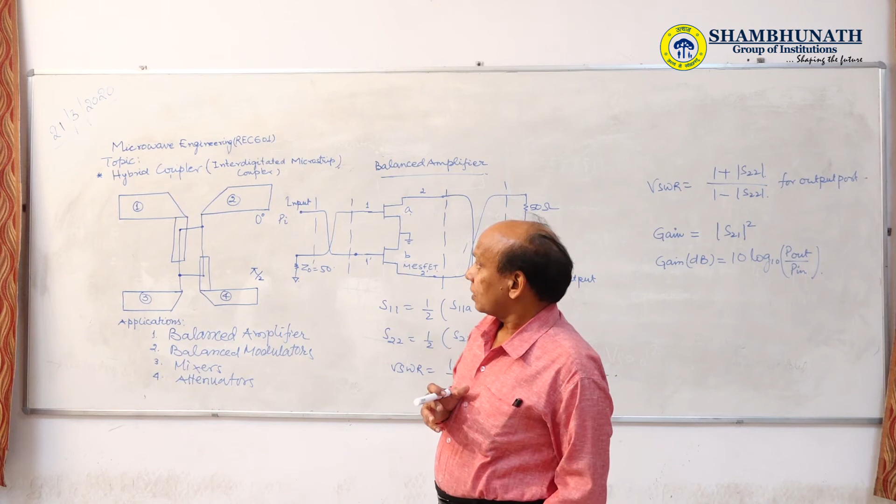That hybrid coupler we are going to discuss today, and its diagram we have already drawn. This diagram shows a hybrid coupler. What we are doing onto this, on a printed circuit board, is that the microstrip patches are cut in such a way that they can be connected by the strip lines, and all these strip lines can be joined by some means. Here we have drawn the hybrid coupler of 4 ports, that is port 1, port 2, port 3 and port 4.

These are the strips which have been fabricated and designed over the printed circuit board. On the upper side of the printed circuit board, this is the diagram of the copper cladding, and underneath this one copper plate is there which will act as ground. This hybrid coupler is connected by this strip and another strip, and these are the small width lines through which all the ports have been connected, connected in such a way that whatever the energy is, we try to understand the function and operation of this hybrid coupler.

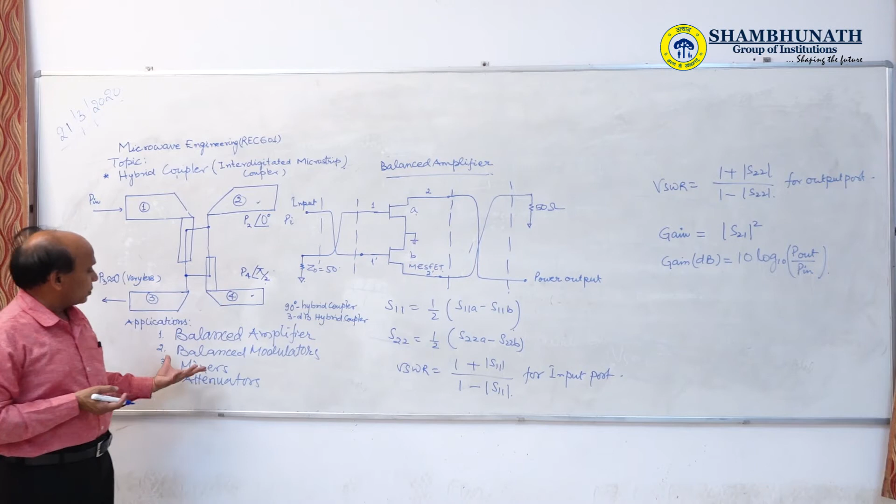This hybrid coupler is used in applications such as the balanced amplifier, the balanced modulator, mixers, and attenuators.

Here we have shown a balanced amplifier where we have used this hybrid coupler, which is also known as the Lange coupler.

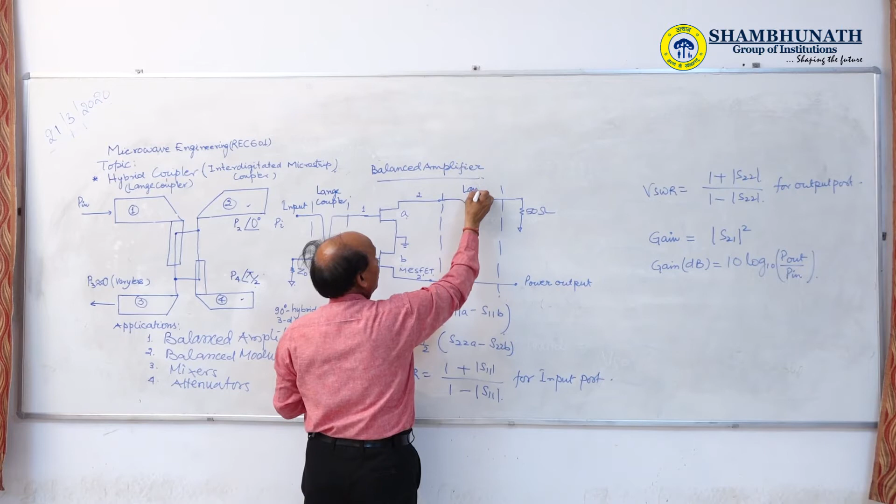Here we have drawn an amplifier, a balanced amplifier, where we have shown the use of the Lange coupler at the input side of this amplifier and at the output of the amplifier. The input of the amplifier is termed port 1, and at the output side the port is termed port 2.

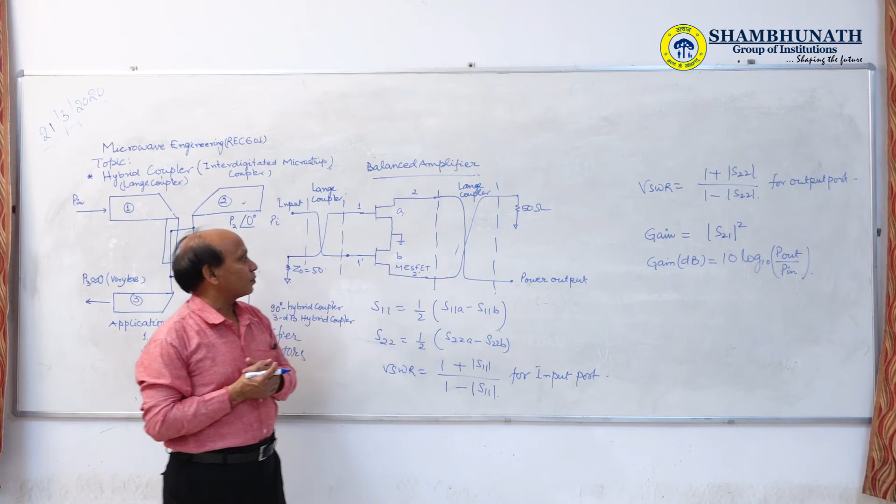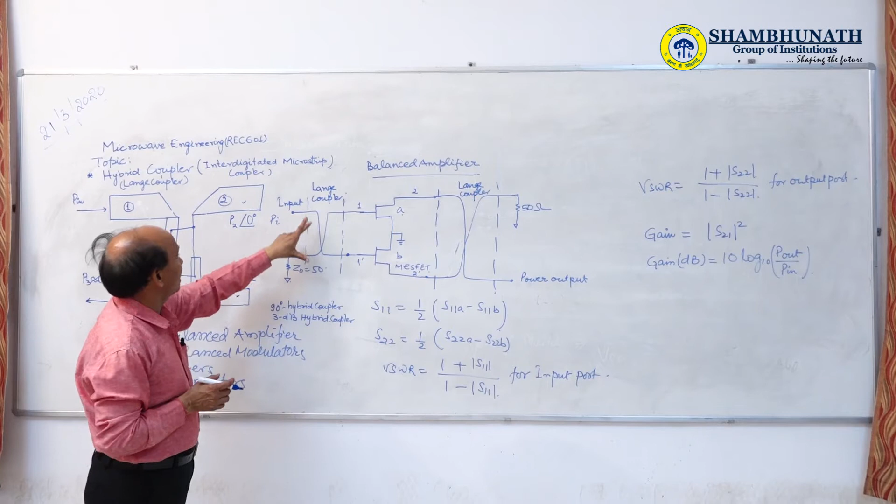Here, if we see this hybrid coupler, this lines diagram is the symbol of this hybrid coupler, which has four ports.

Here what we have done is that at port 1 it has been connected where input is fed, and port 3 of this coupler has been terminated by a 50 ohm impedance, whereas this power is routed onto port 2 and port 4. As we have considered here, when the power is fed, some of the power goes onto these ports, port 2 and port 4.

So similarly, this is port 1, port 2, port 3, and port 4 of this hybrid coupler. This is hybrid coupler port 2 and this is port 4. So the power may be available here in 0 degree phase shift and 90 degree phase shift.

When this is conducting, when one amplifier is conducting, the output is available onto this, and when this other one conducts, output will be available onto this. So this port power output is derived from port 2 and port 2 dash. The power may be connected here and the output can be taken from this port.

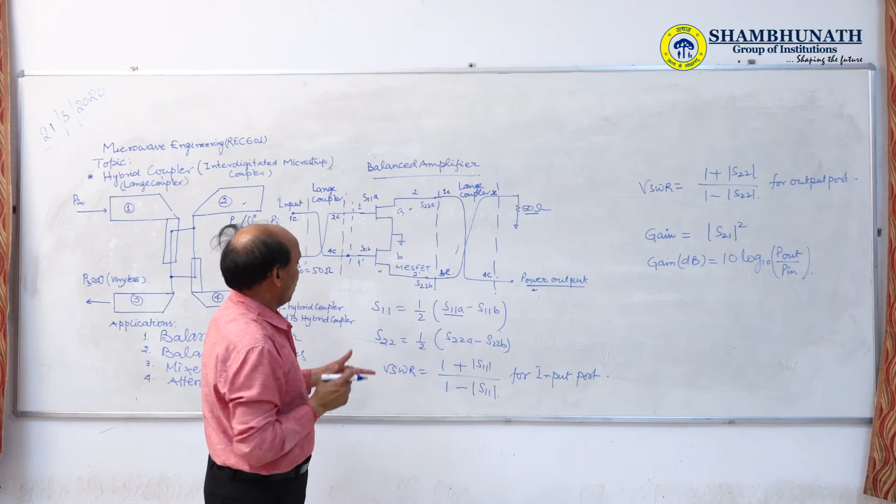By taking the difference of these two reflection coefficients and taking the average, we get the S11 parameter. S22 parameter is also achieved by taking S22A and S22B, minusing them, then dividing by 2. So we get S22 and S11 both.

The important parameter is VSWR for the input port. VSWR, as we know, is nothing but the standing wave ratio, and standing wave ratio is the health measurement for the amplifier here. This will be depending upon S11 and S22 for the output port.

For the input port, VSWR is calculated by this formula, and for the output port we have the calculation by this formula, that is VSWR is equal to 1 plus S22 divided by 1 minus S22 for the output port.

Here the gain is S21 squared parameter, and this is also usually written as gain in dB is equal to 10 log of P out to the P in power, to the base 10.

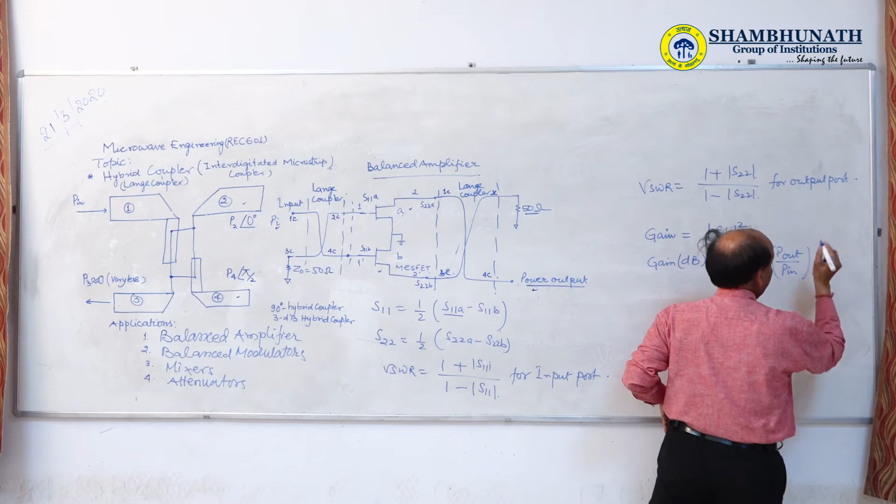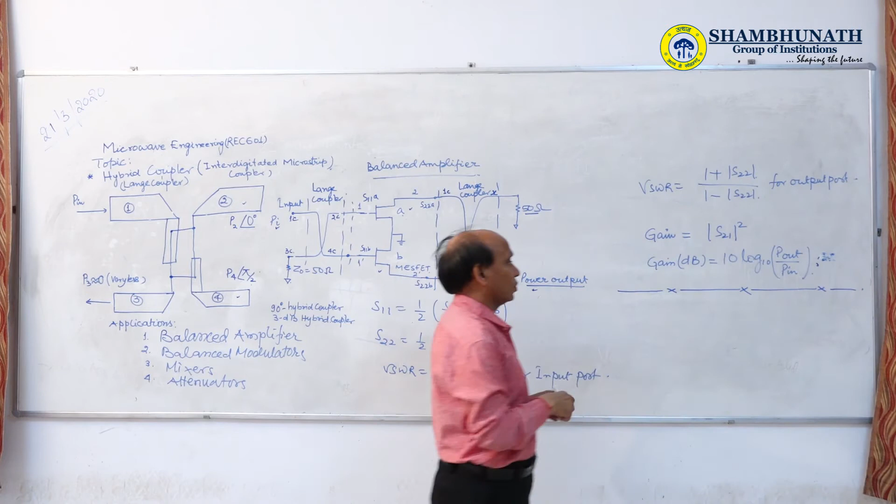We'll see the next topic. Okay, we'll see the next topic afterwards. Close it.

Now we are going to discuss about the circulators, and in these circulators the important phenomena is the Faraday rotation. So we'll have the phenomena, that is Faraday rotation, and then we'll discuss about the circulators through which the waves can be rotated in one particular direction. Okay, so have this look.

Faraday rotation. If we talk about the Faraday rotation, one ferrite rod is taken, on some particular length and some particular radius or diameter.

Here we apply the magnetic field, DC magnetic field. We apply the DC magnetic field. This is magnets we call, these are the magnets. So we say these are the magnets.

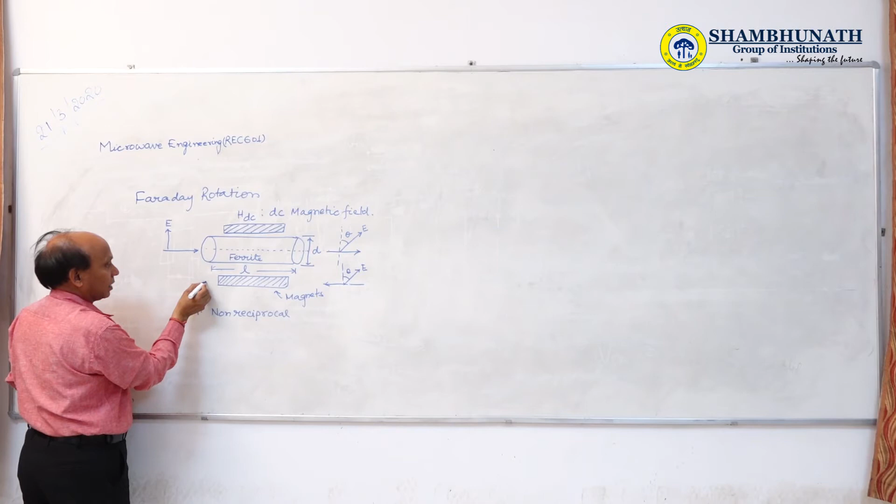This device is non-reciprocal. It means when the wave moves from our right hand side towards the left hand side, then suppose the same wave at this particular angle anyhow rotates, then this will have the rotation by the same angle, by the same angle theta, in the same particular direction.

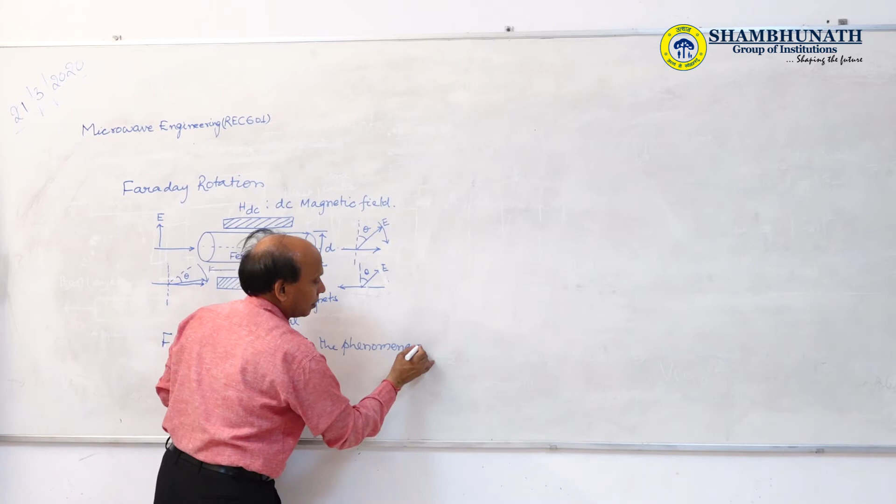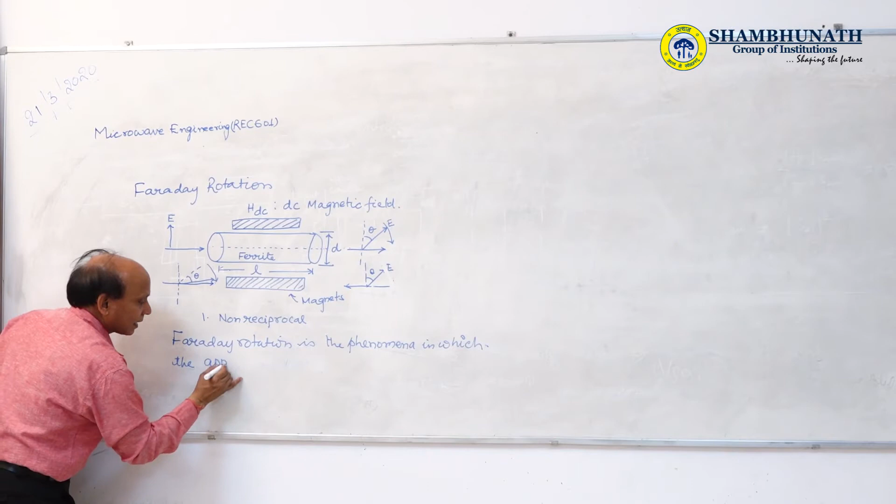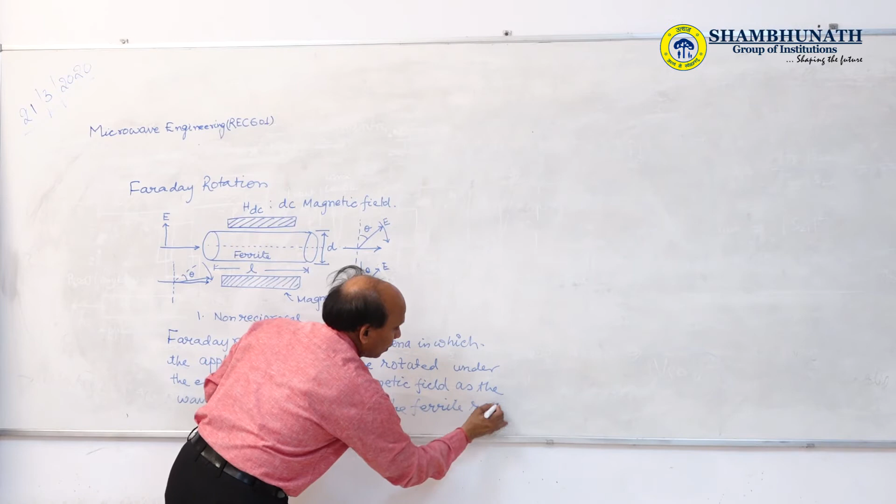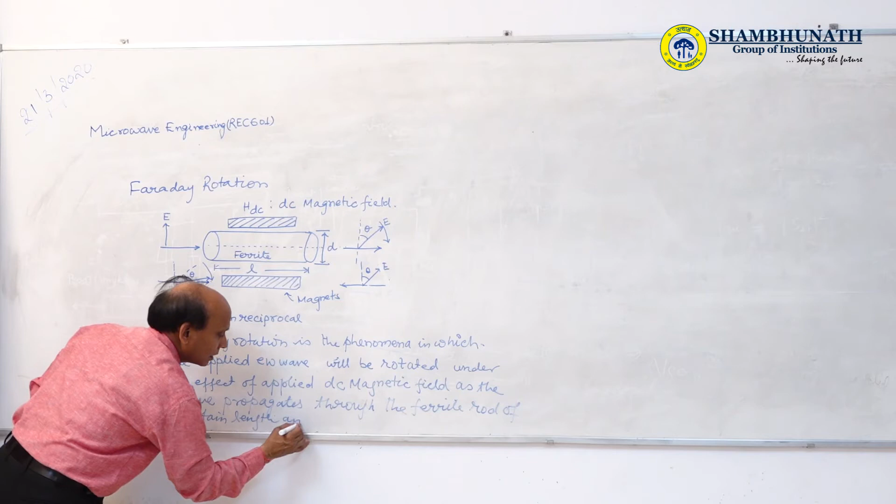So what have we discussed, what is Faraday rotation? Faraday rotation is the phenomena in which the applied EM wave will be rotated under the effect of applied DC magnetic field, as the wave propagates through the ferrite rod of certain length and diameter.

I feel it might be clear to you, that is what is Faraday rotation.

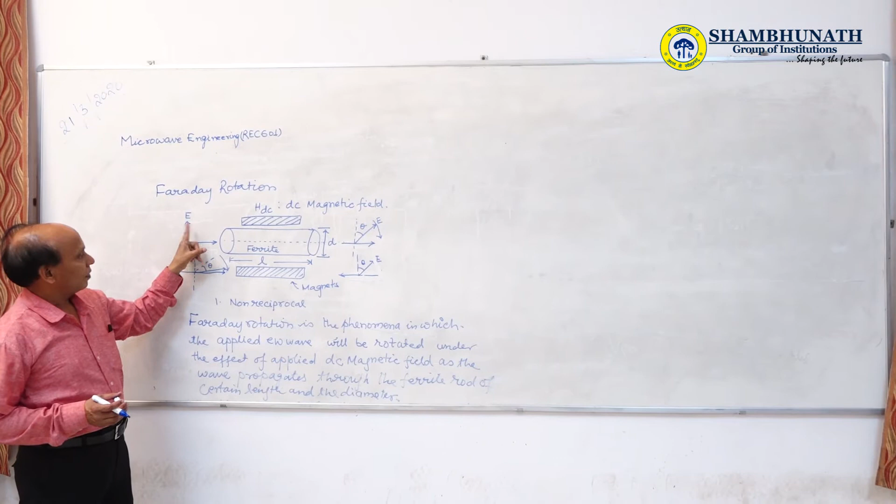Now you see in this example what we have done. This is ferrite rod. Ferrite rod is that metal oxide, divalent metal oxide, Al2O3 material, and in this ferrite rod the EM wave is propagated or passed through this, and we are seeing that the electric field has turned with reference to this reference line by angle theta in clockwise direction.

And similarly, if the same wave is reflecting back, it will have the same rotation but in the same clockwise direction. Here it has the property to rotate this electric field vector in the clockwise direction. When it is passing through this, again it will rotate the vector in the same direction, not in the anti-clockwise direction. So that is Faraday rotation.

Why does it happen? The reason is, when we pass this EM wave through it, the dipoles available in this ferrite rod are aligned, and that alignment of molecules or unpaired electrons pressurizes this electric field vector to rotate in one particular direction. That is the reason. So by having this Faraday rotation property of the ferrite rod, we are going to discuss the circulator, and as we have discussed, the directional coupler.

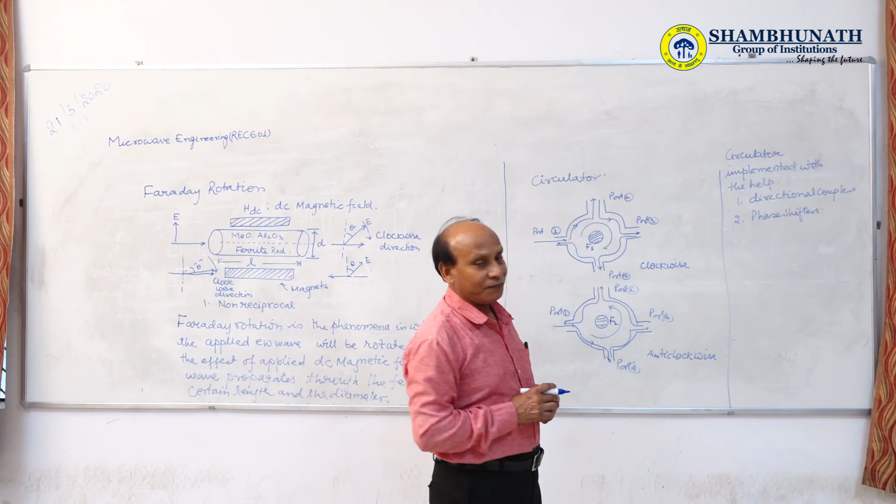Okay, so here we have one schematic diagram for the circulator implemented with the help of directional couplers and the phase shifters. Let us consider this diagram here. I am omitting this diagram and then we'll see, by having a clear picture, what we are doing.

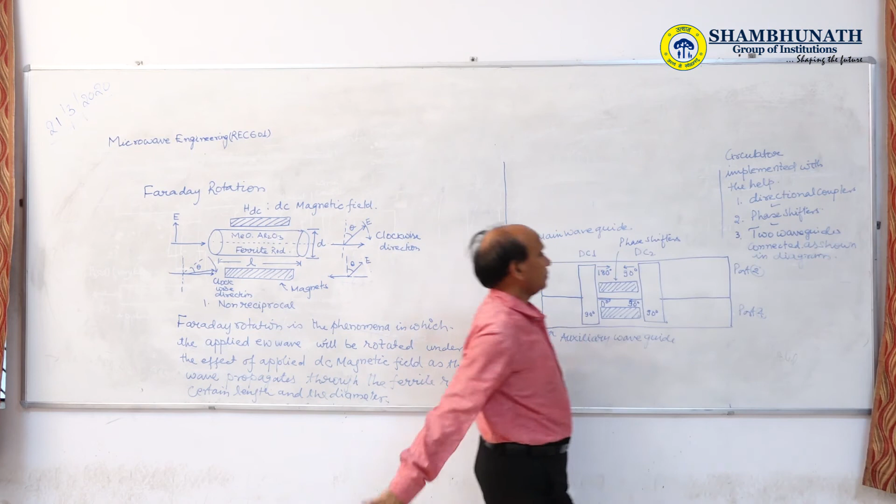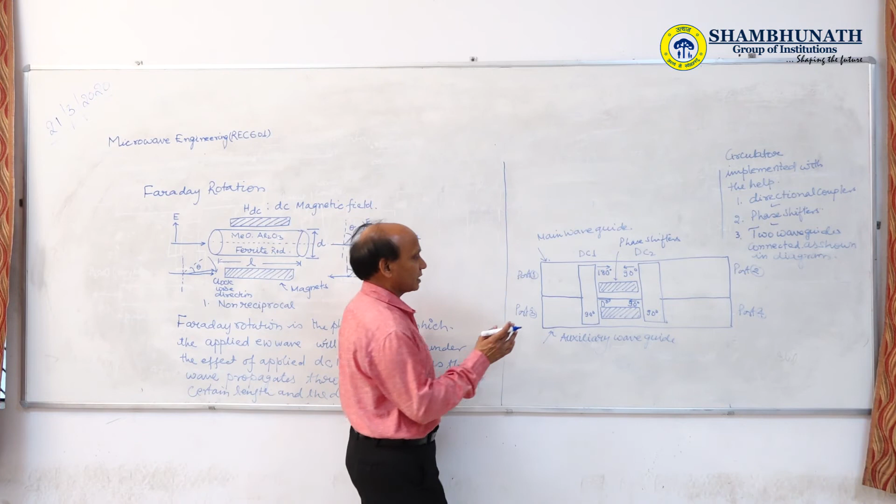So let's take the EM wave propagation through the circulator and see how it propagates. Suppose we apply the source at port 1. The input or incident power of the EM wave is flowing, and it has to go from port 1 to port 2.

When it is going from port 1 to port 2, this wave, when passing through here, will have a 180-degree phase shift. This wave is not propagating through this hole, so the directional coupler will not give any phase shift to this wave. Only the phase shift will be assigned by this phase shifter to this wave, that is 180 degrees onto this port.

Now this wave may be routed to the phase shifter, which will provide a 90-degree phase shift, and it is again routed onto this. This phase shifter is providing a 0-degree phase shift to this wave, and this directional coupler again provides a 90-degree phase shift. So both the phase shifts are added, and here again we get this wave, wave 1 to 2.

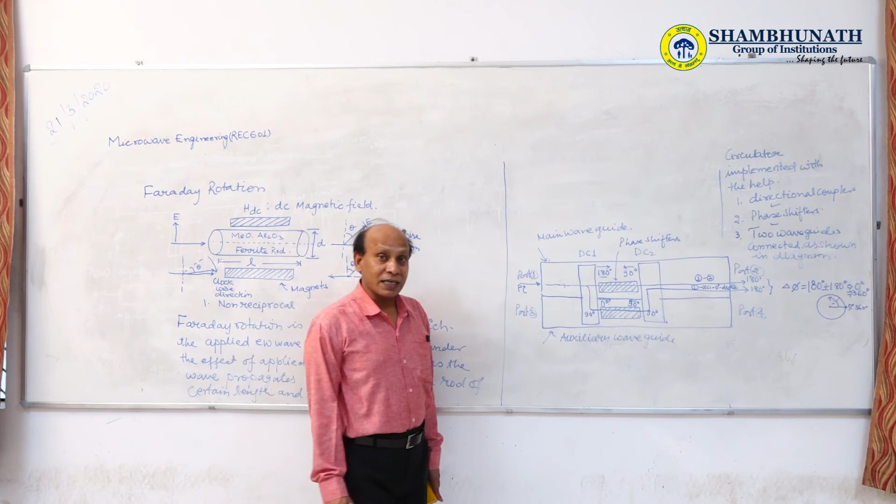Now the wave which is passing onto port 4, how is it passing? The same way, when it is traveling through this, if it is to be routed onto port 4, then this wave will be routed onto this, where a 180-degree phase shift has been provided.

And now this wave is traveling through this directional coupler, so this is provided 270-degree phase shift. Here 270-degree phase shift. This is 180-degree phase shift onto this wave, and this is 90-degree phase shift provided by directional coupler 2 onto this, and we get here the wave from 1 to 4, that is 270 degrees.

Again, this may also move through this. Here suppose this is the wave which is routed onto port 2. If we have the direction of this wave onto this part, when it is not traveling through the hole, it is given a 90-degree phase shift, and here it is given - this is 90 degrees, see this, and this is 0-degree phase shift.

So the wave will be routed onto this direction, and this will have a 90-degree phase shift. If we talk about the phase shift available at port 4, this is at port 2, this is available at port 4. So 270 degree minus 90 degree is equal to 180 degree. It means the wave available from port 1 to this phase shifter, through a phase shift of 180 degree, then through a phase shift of 90 degree, reaches port 4. And the wave coming from port 1, through the phase shifter of 90 degree, then through this 0 degree phase shifter, is available onto port 4.

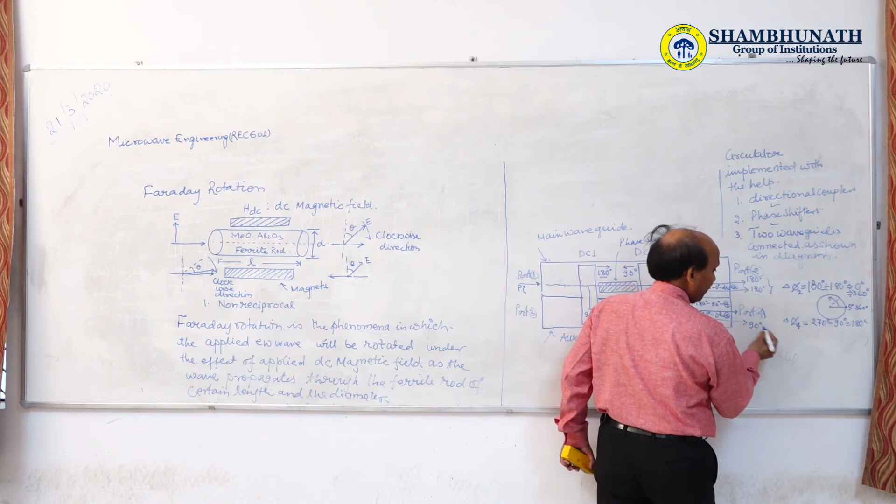So if we see the phase difference between them, it means at port 4 the wave will not be received, meaning cancellation of wave will be there.

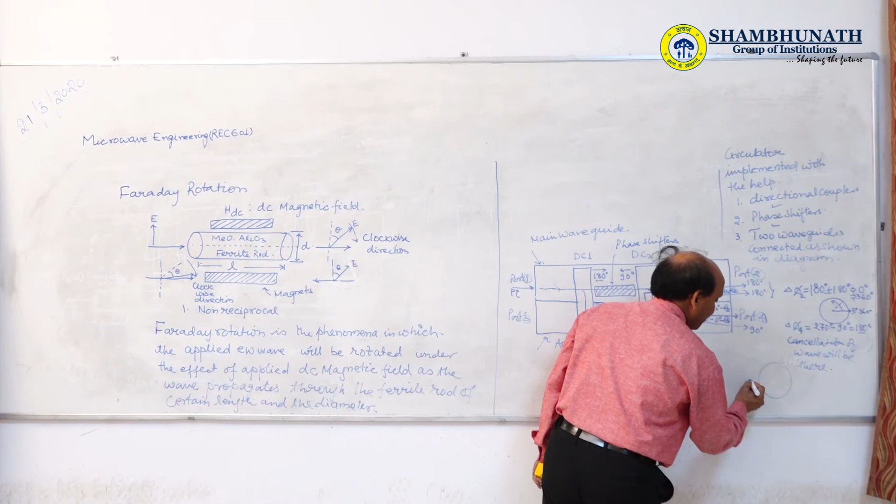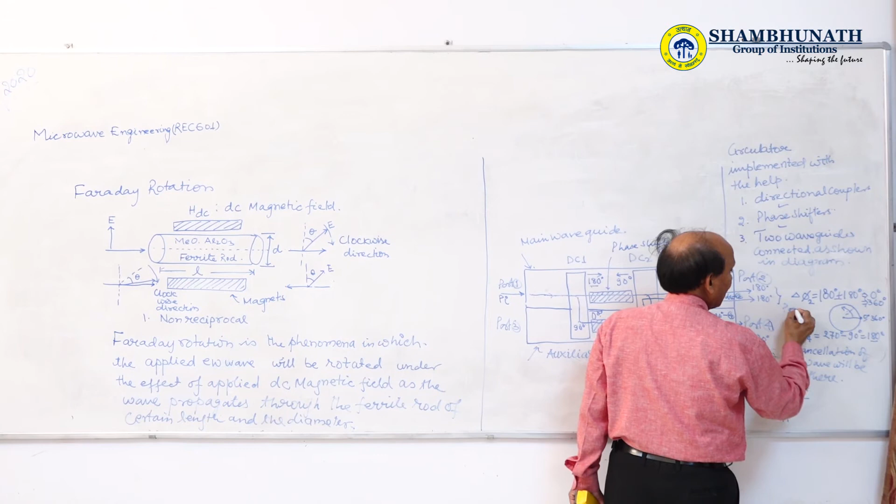It means what we are saying: if we have made a circulator moving from port 1, then this port 1 will be routed to port 2, which we have received here. It is in phase, so the powers are added, and we achieve the wave in phase.

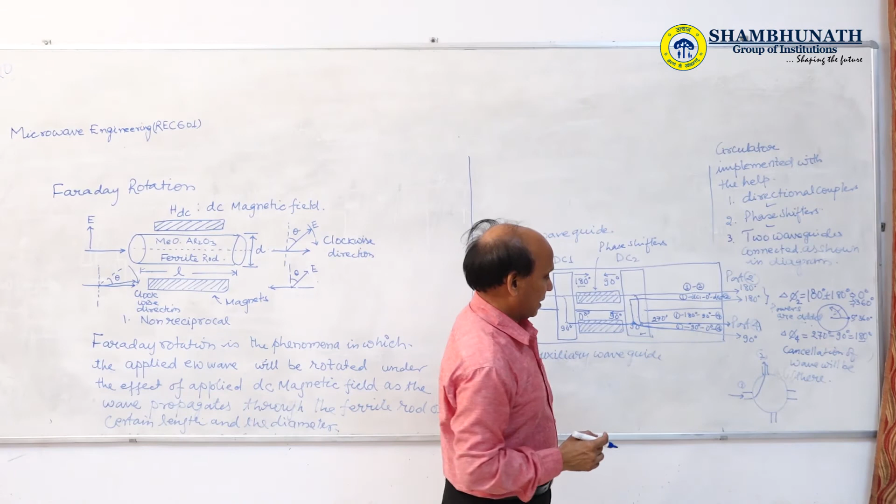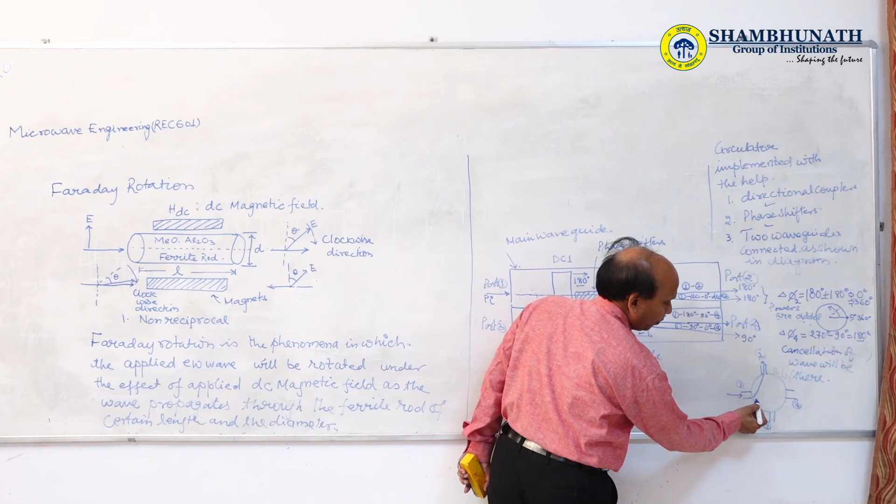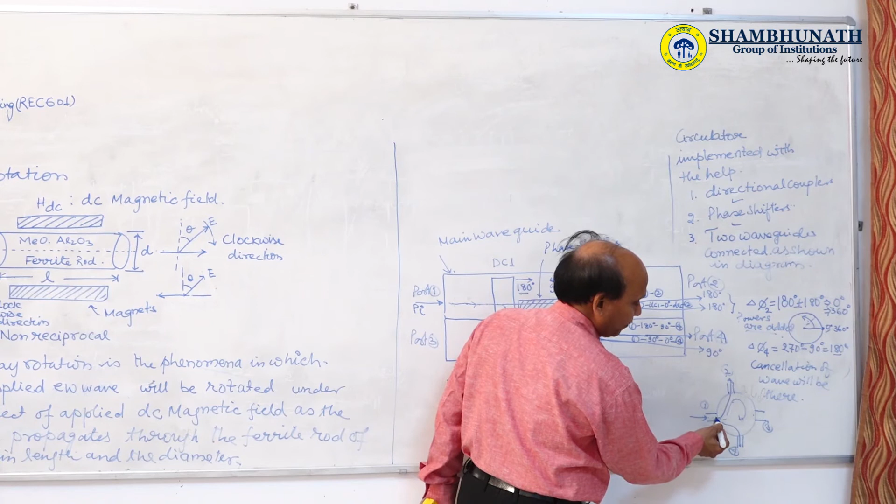But this is port 4 and this is port 3. The flow of power from port 1 to port 4 should not be there, because it is a circulator circulating in clockwise direction. So it must come from port 1 to port 2, port 2 to port 3, but it cannot be directly routed from port 1 to port 4. So when the power is routed from port 1 to port 4, this power gets cancelled, because they are 180 degree out of phase.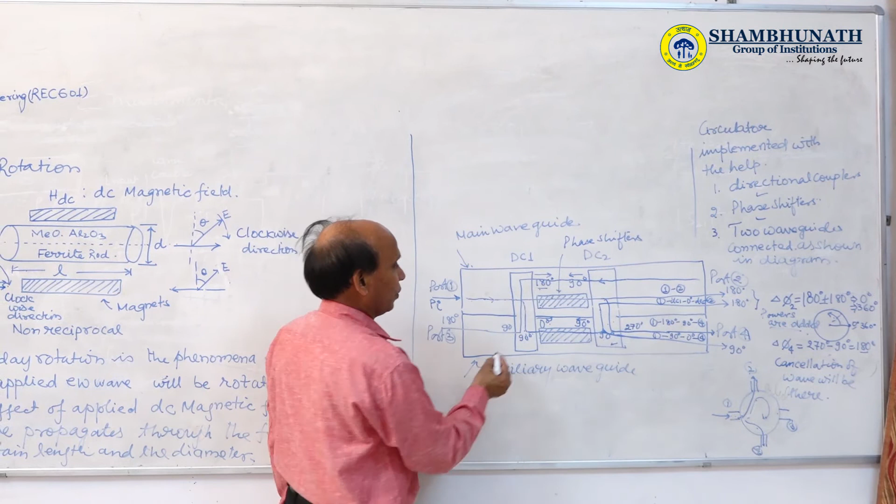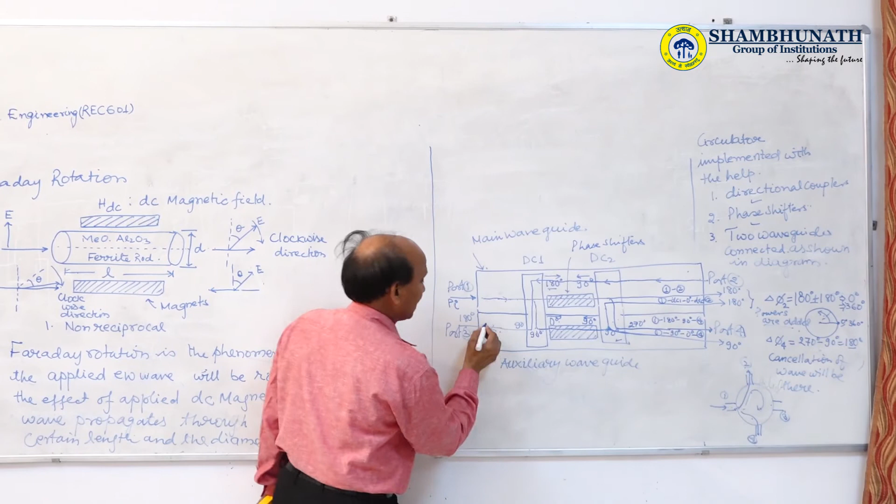Suppose there may be a probability that the wave is coming from port 2 to port 3. The wave returning from port 2 will have a 90 degree phase shift in this direction. Suppose we have another wave coming from port 2, it will come here with a 90 degree phase shift, and again it will be routed, with another 90 degree phase shift. So here 180 degree phase shift will be there for this wave traveling from port 2: it has traveled from port 2, then 90 degree phase shifter, then again 90 degree phase shifter, then it is available at port 3.

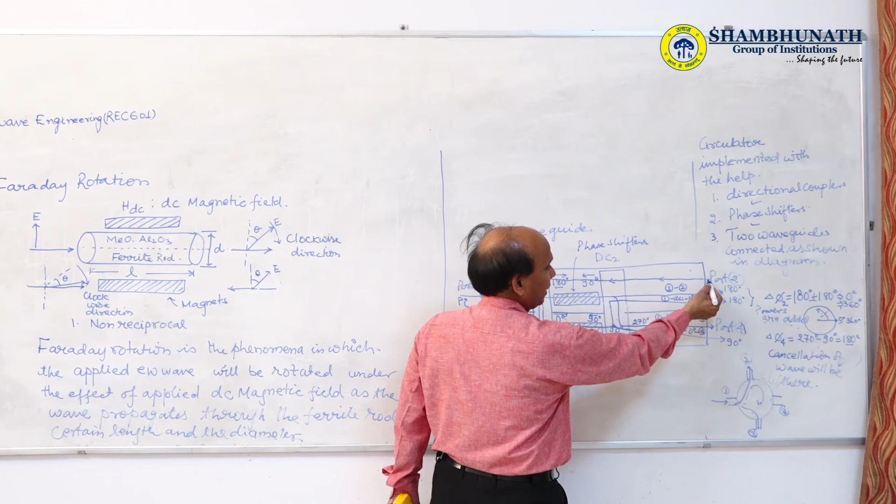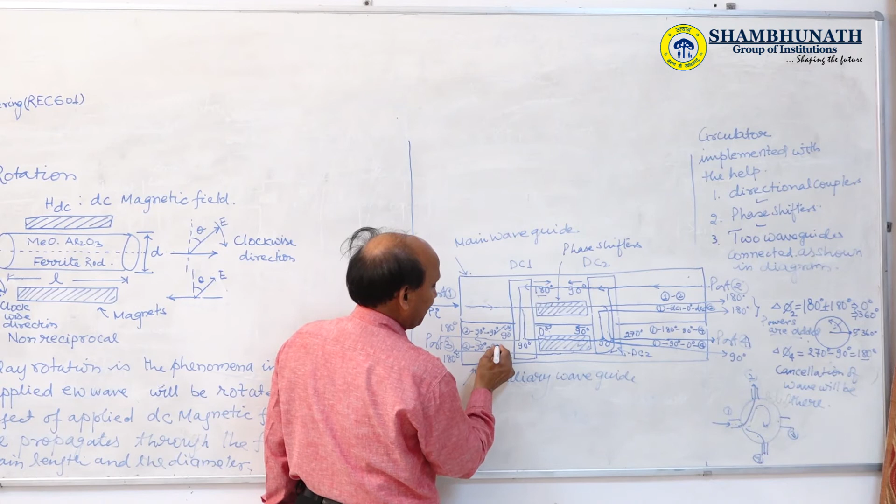Suppose from the same port 2 there is another probability that the wave may be routed through this hole. If the wave is coming through this hole, it will have a 90 degree phase shift, again a 90 degree phase shift by this directional coupler DC2, and a 90 degree phase shift by this phase shifter in this direction, and then here we have again a 180 degree phase shift. So from port 2, it has undergone a phase shift of 90 degree, and again a 90 degree phase shift, then it is available at port 3. So the phase difference between the two waves, del phi 3, is equal to 180 degree minus 180 degree, that is 0 degree phase shift, and the waves will be added.

It means that wave can be routed from port 1 to port 2 and port 2 to port 3 in phase. If the wave is to be routed from port 3 to port 4, that will be available.

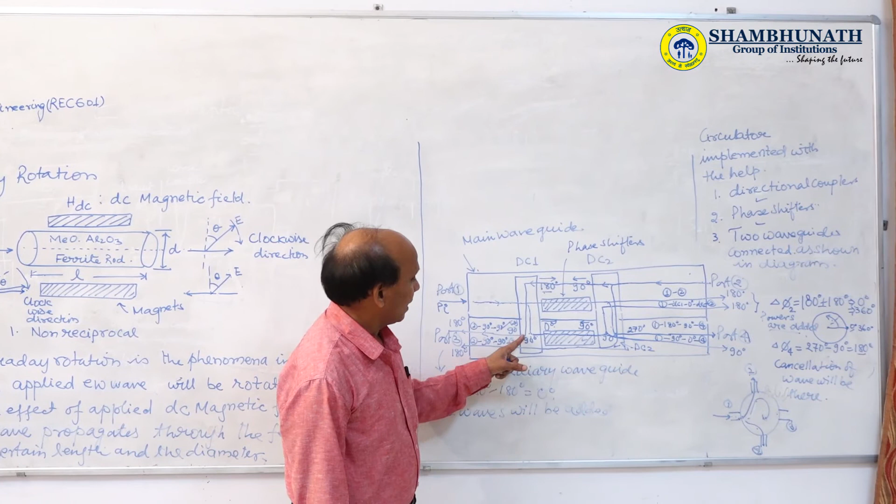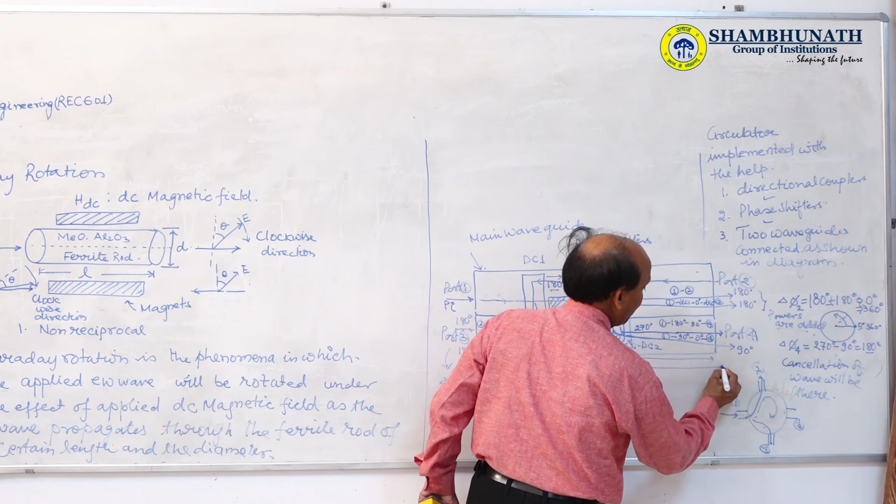Suppose the wave is traveling through this, one wave having a diversion through this medium, through this hole, through this directional coupler: that is 90 degree phase shift, 180 degree phase shift, then 90 degree phase shift, meaning 360 degree phase shift. It will be available here from port 3 to port 4. And another wave may have another path traveling through the phase shifter, the 0 degree phase shifter, having only a 0 degree phase shift. So when routed from port 3 to port 4, they will have 360 degree phase shift and 0 degree phase shift, which means 360 degree phase shift is again 0 degree phase shift, and so the power will add.

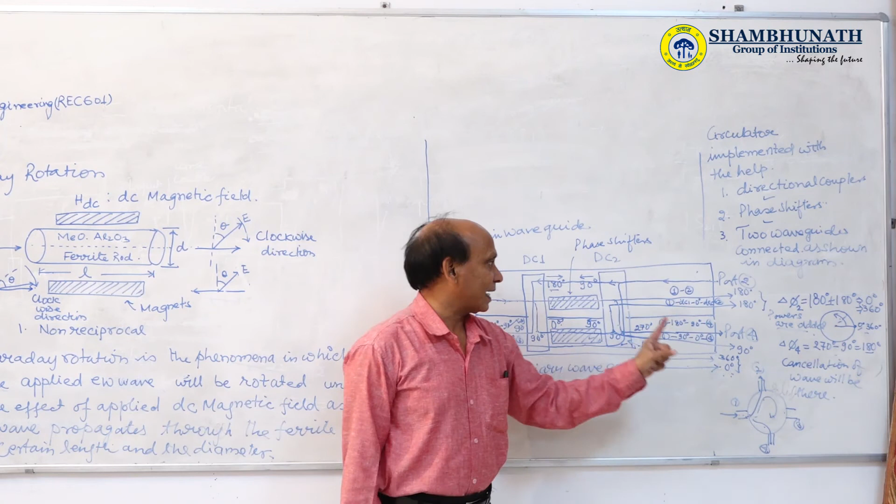It means the power can be routed from port 1 to port 2, port 2 to port 3, and port 3 to port 4. But they cannot be routed like port 2 to port 1 or port 1 to port 4 in the other direction.

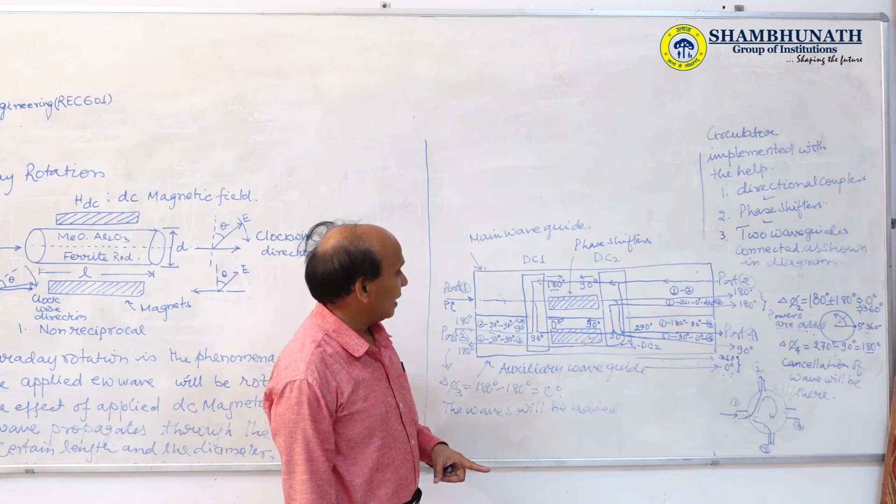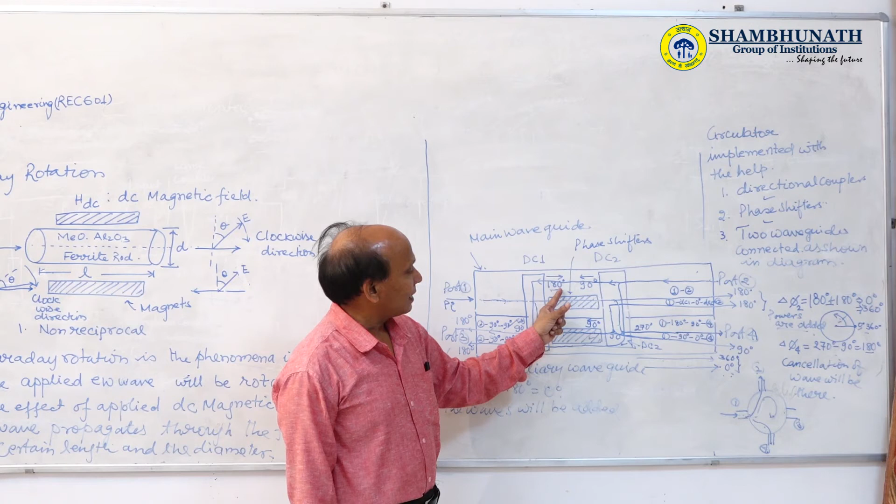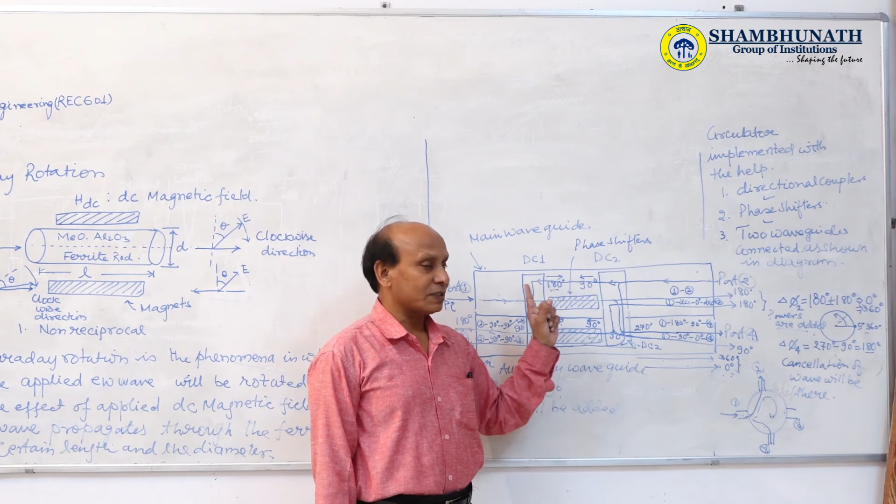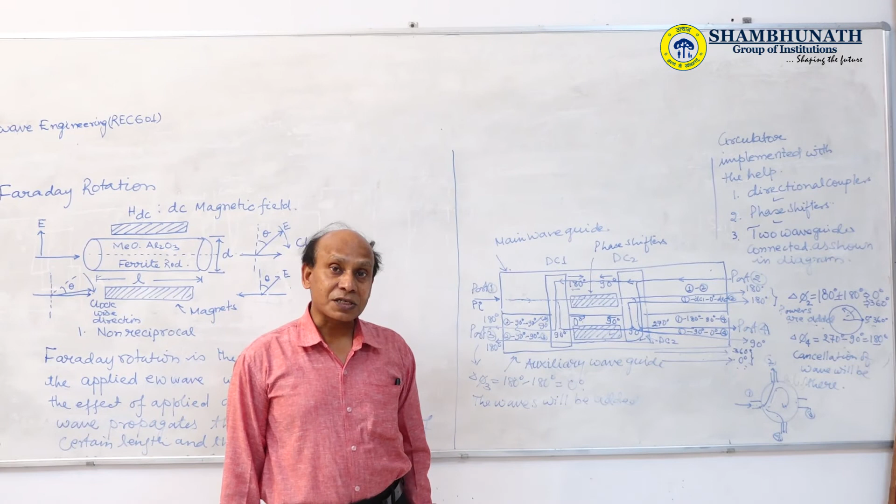So here this circulator has been implemented using two directional couplers, two waveguides, and two phase shifters, which provide a phase shift in the forward direction of 180 degrees, and 90 degrees in the reverse direction. Here it gives a 0 degree phase shift, and 90 degree phase shift in the third direction. This circulator is again used at the last stage of the RF amplifier, that is, when the antenna is connected to the transmitter.

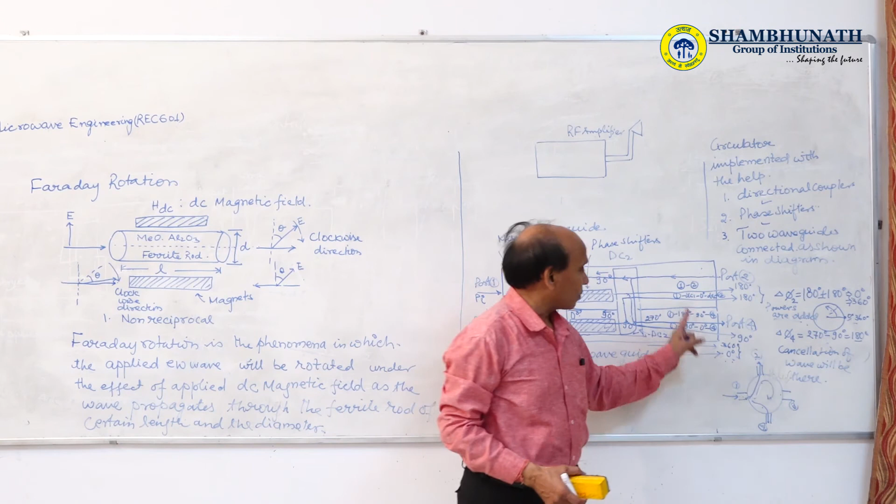If we see this circulator, how it is provided - this circulator can be applied into the transmitter at the last stage RF amplifier stage, where we can have 3 ports: one antenna connected here, another antenna connected here, and we can take a sample from here. We can utilize this circulator at the end, and the same circulator can be used for making the isolator.

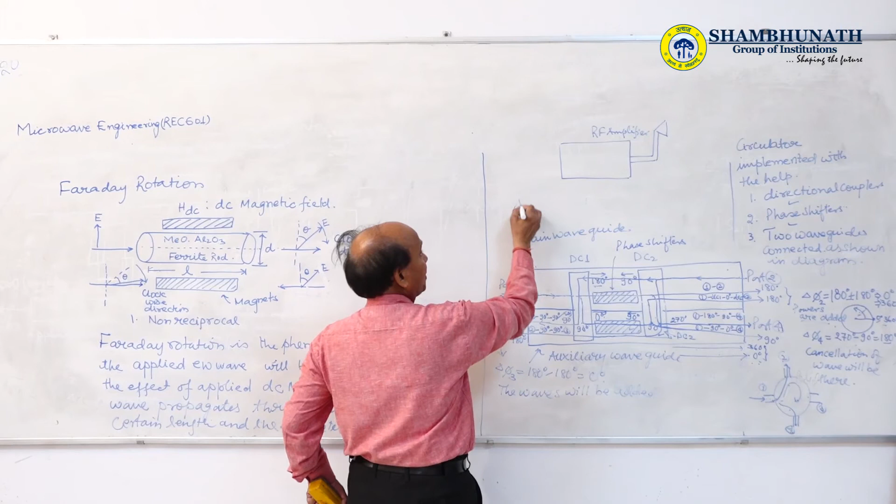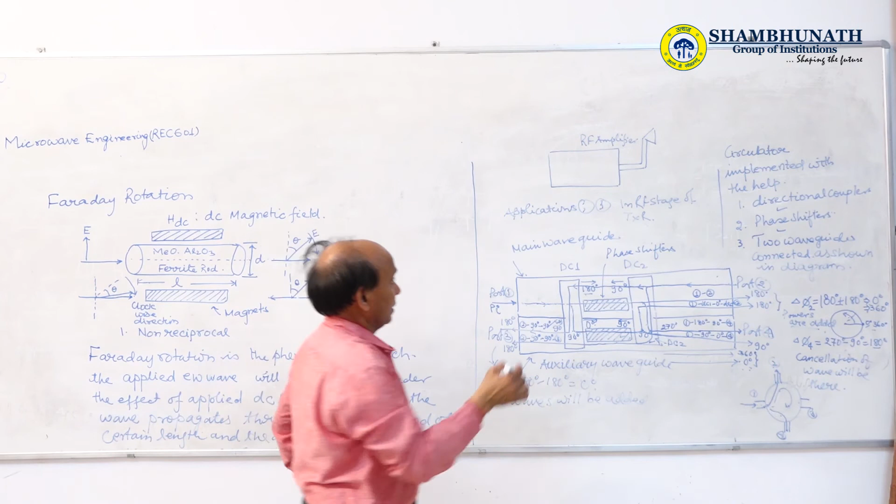So the applications: Number 1, in the RF stage of the transmitter. And another application, the isolator may also be implemented by the same.

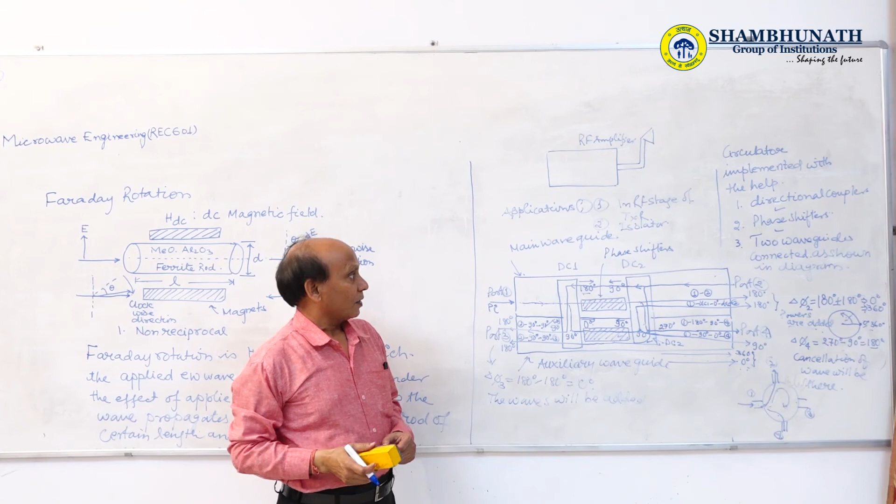Welcome back to the session. Next session is for the Faraday rotation isolator.

This Faraday rotation isolator, as we have already discussed, prevents the reflected wave which is generated due to the mismatch of the load impedance from the source impedance. If there is any mismatch, then power is reflected back from the load side towards the source side, and this reflected power may damage the source. That's why a device is required which can isolate those reflected powers from the source in the reverse direction.

We will see how it is going to function. In this we have some components: one waveguide portion that is a twist, this is the waveguide port, here we'll discuss it.

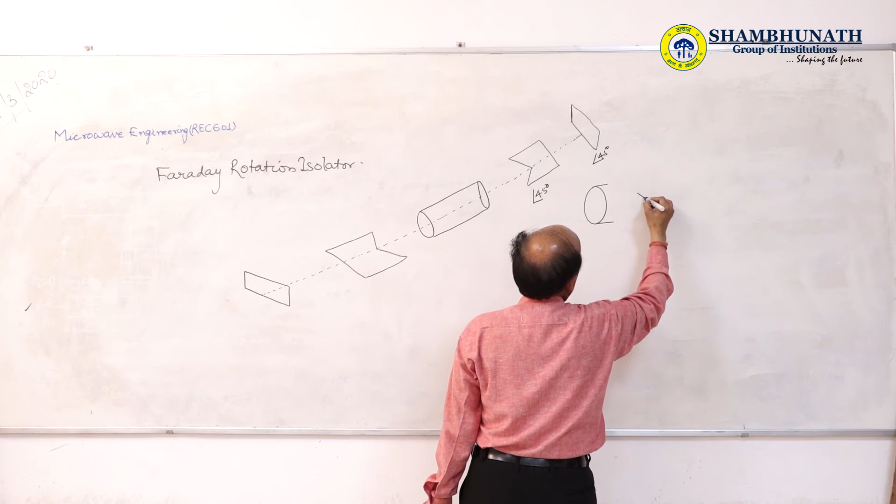So one transition is there - here this port, it shows this is also at 45 degrees, and this is a transition which is used from the circular waveguide to the rectangular waveguide connection. So here we see this waveguide is connected like this, and this is connected like this. So this is one transition, practically for circular waveguide to rectangular waveguide.

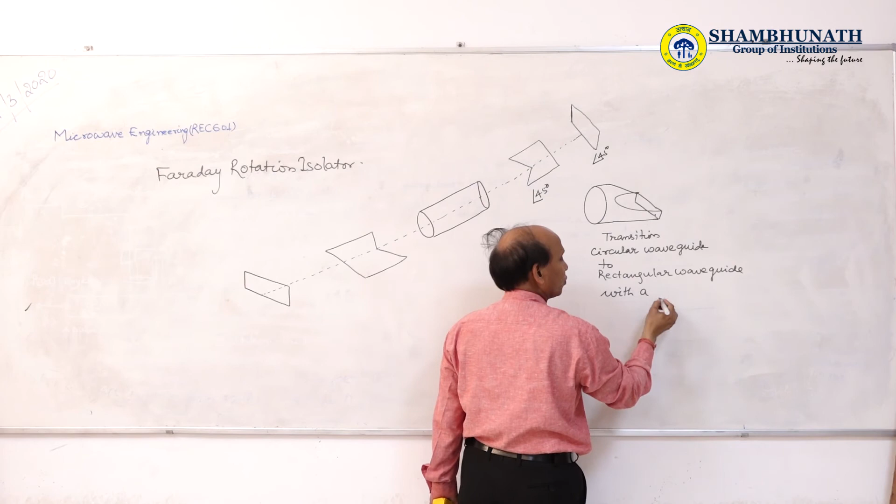With a twist of 45 degrees. Here also this port is a transition, from rectangular waveguide to circular waveguide, without a twist. So here we will use the dominant mode for the wave.

Here we see the propagation of the wave in TE10 mode, TE10 mode propagation. The EM wave will have an electric field vector perpendicular to the direction of propagation, and for convenience, we are taking this electric field vector perpendicular onto the metallic plate.

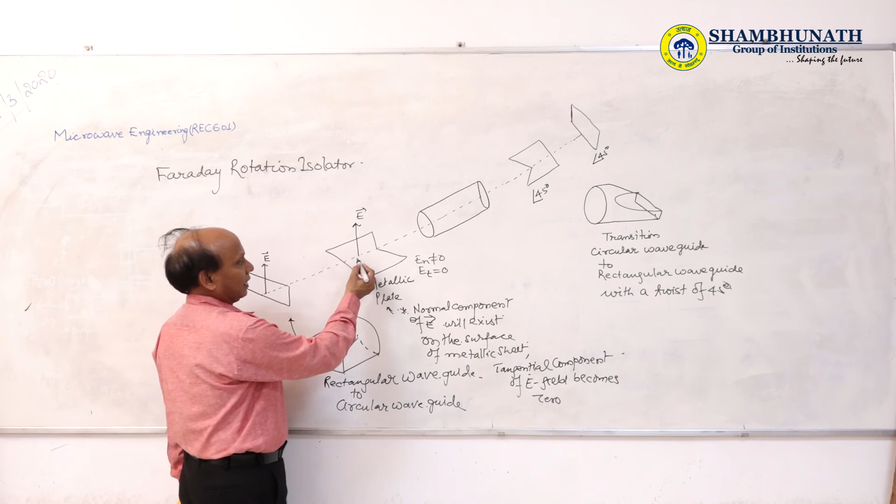So then onto this metal sheet, the EM wave will exist and propagate, and it will be incident onto the surface of the ferrite rod, which is under the effect of a DC magnetic field.

This ferrite rod has been cut for a phase shift, for a rotation of 45 degrees from the reference. So this is the reference line. Suppose this is EI, and suppose it is shifted in the clockwise direction, suppose EI dash.

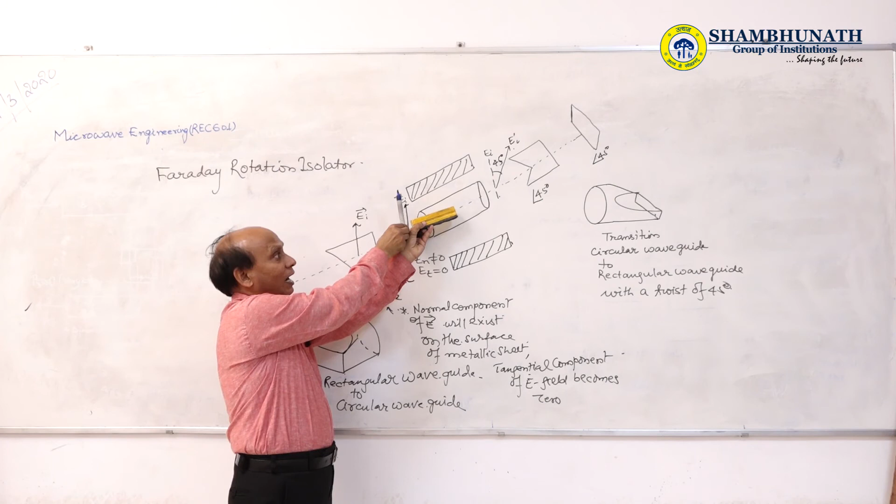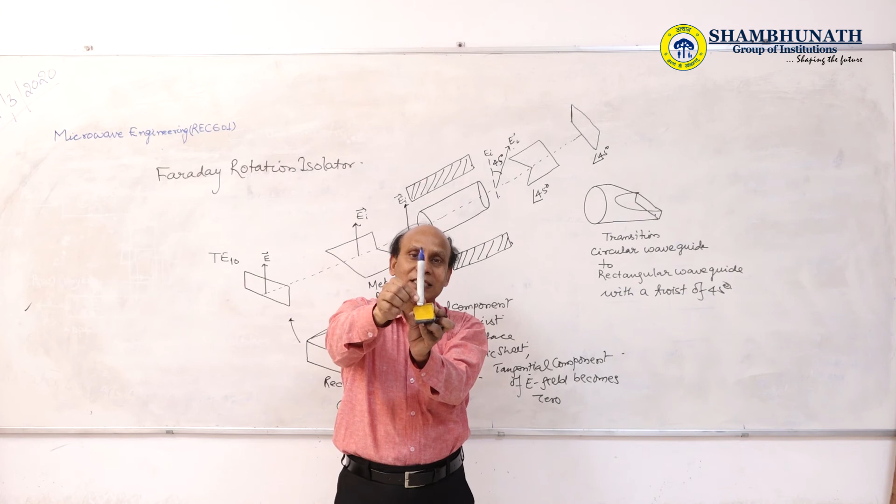This has been shifted by 45 degrees. Now we see the wave, suppose this is our ferrite rod, and the wave component is like this. As the wave is traveling through this phase shift, this ferrite rod will rotate this electric field vector in clockwise direction. When it is moving directly from this, as it is propagating, it will be tilting, and for whatever angle it has been manufactured, for that particular angle, this wave will be tilted by 45 degrees.

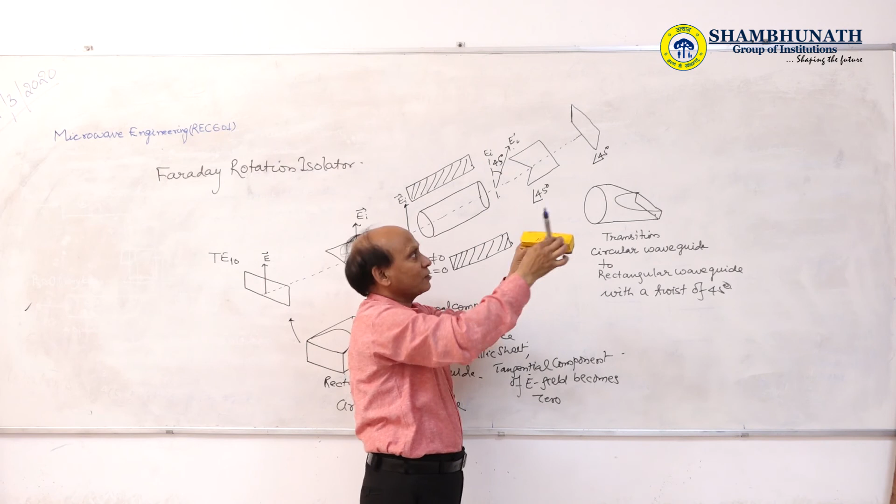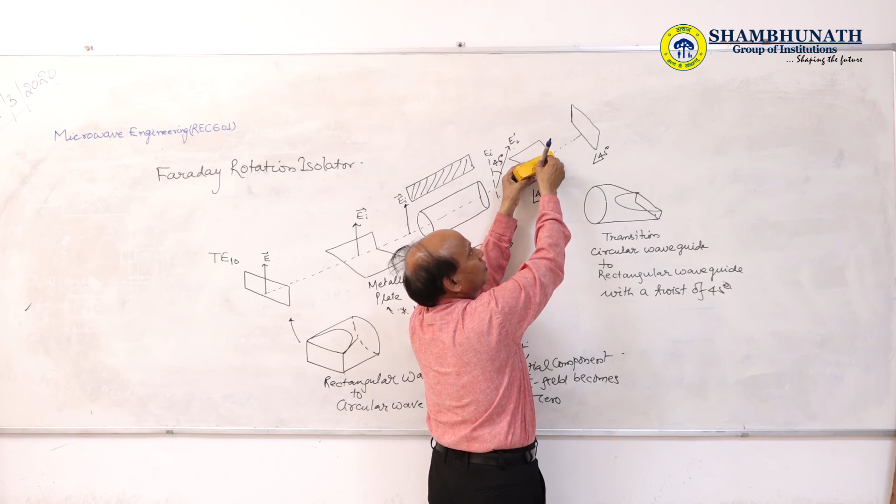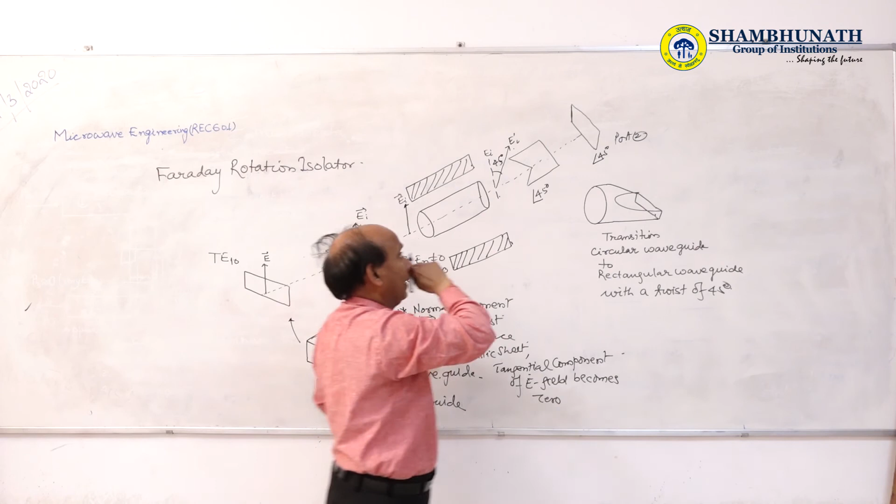So this ferrite rod has been specified to be tilted by 45 degrees. When tilted by 45 degrees, to remain perpendicular, this plate which was available flat here, and this component is traveling like this, but from here it has been tilted by 45 degrees. So this output plate also has been tilted by 45 degrees to make this electric field vector perpendicular onto the surface of the plate, so here also it will be perpendicular. So 45 degrees it has been tilted, so this will remain as 45 degrees, perpendicular onto this port, and accordingly port 2 has also been tilted by 45 degrees, to make it perpendicular onto this port and maintain this TE10 mode, and this port also.

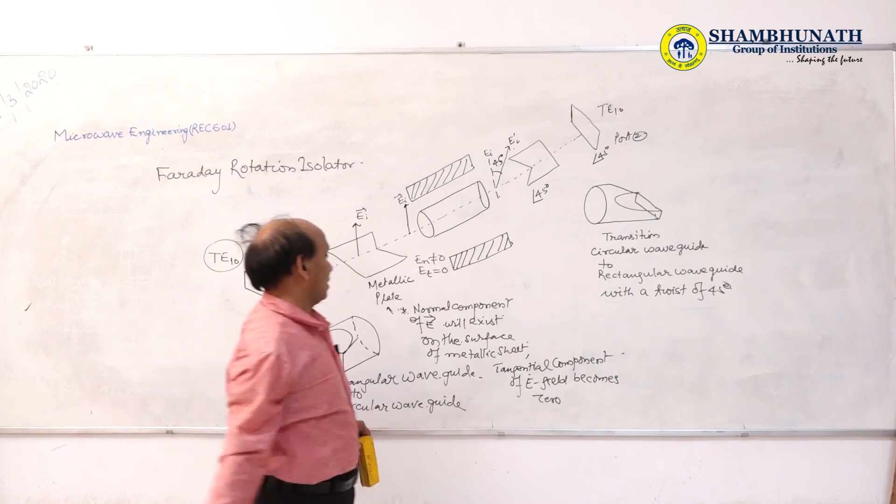But what is happening here? This circular waveguide has been placed here. One transition has been placed onto this plate. It means this whole structure is inside the circular waveguide. We can say this whole structure is inside the circular waveguide, it is not in the rectangular waveguide. So this is in the circular waveguide, we can see.

Now this circular waveguide is having this structure inside it, this structure also is inside the waveguide, that is circular waveguide. This also is in the circle. So plate 1, ferrite rod 2, and plate 2, they are inside the circular waveguide.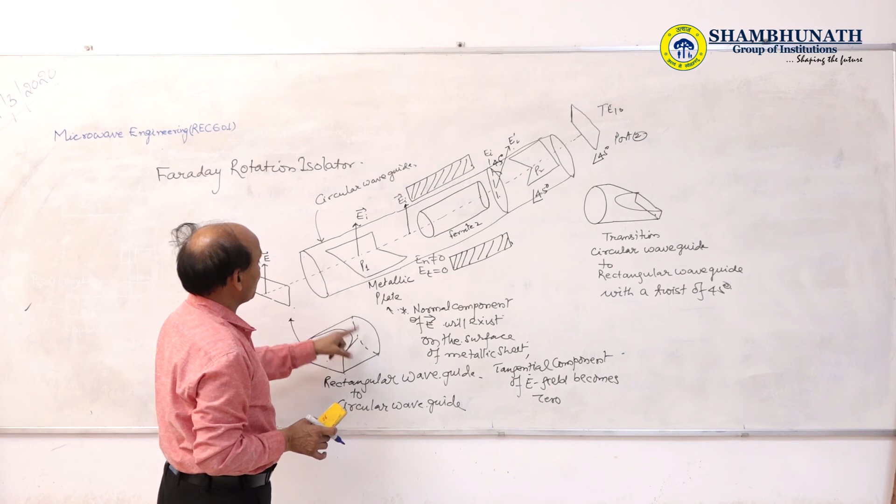And here for this rectangular port, it has been converted from rectangular port to circular port, with the same dimension of cross-sectional area, and this port and this port will be fitted, they will be screwed, they will be fitted. Here the transition twist also is there, so we can say it is to be twisted also. So we can have one twist of 45 degrees.

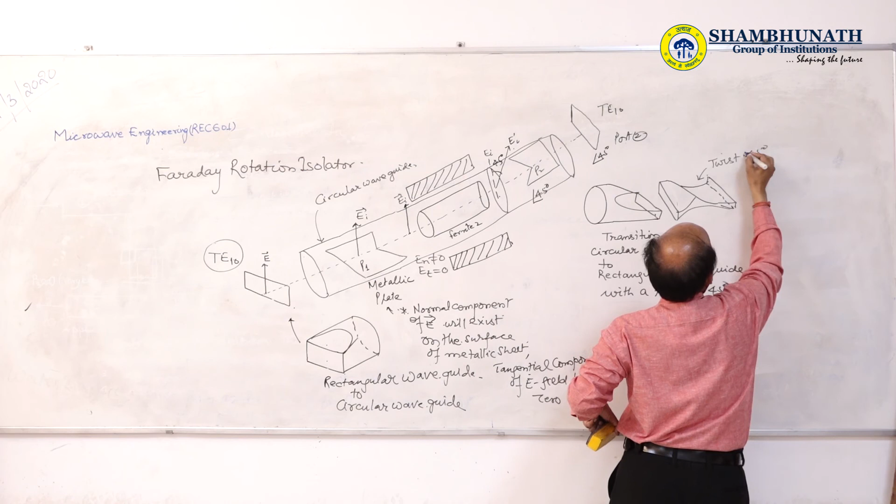Twist may be there, and it may be connected. So this is a twist of 45 degrees. So it can be connected like this.

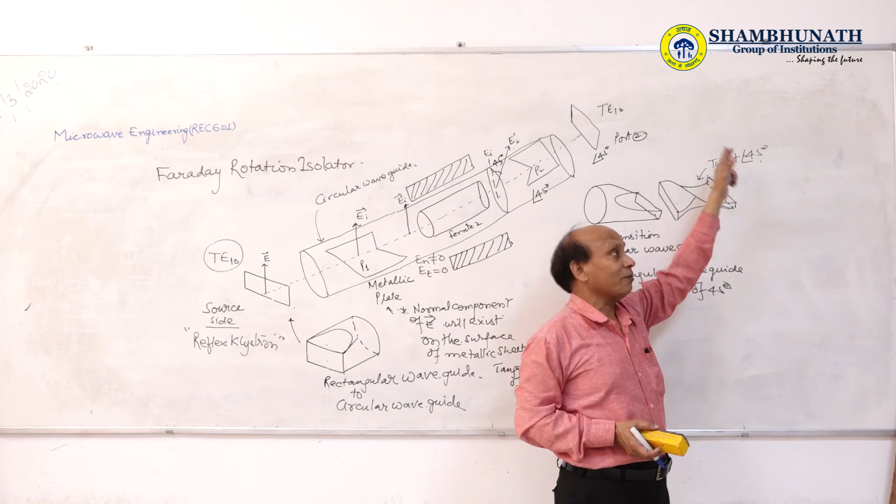So what is being done is that when the wave is propagating from the source side, here we have said the source is available at this port. As we see in our lab, the source is nothing but the microwave test bench, that is reflex klystron is available. But if we see the load side, one frequency meter has been connected, and after that frequency meter, one variable attenuator is connected. Then after that variable attenuator, one antenna is connected. If we recollect that position of the isolator, then see what is happening.

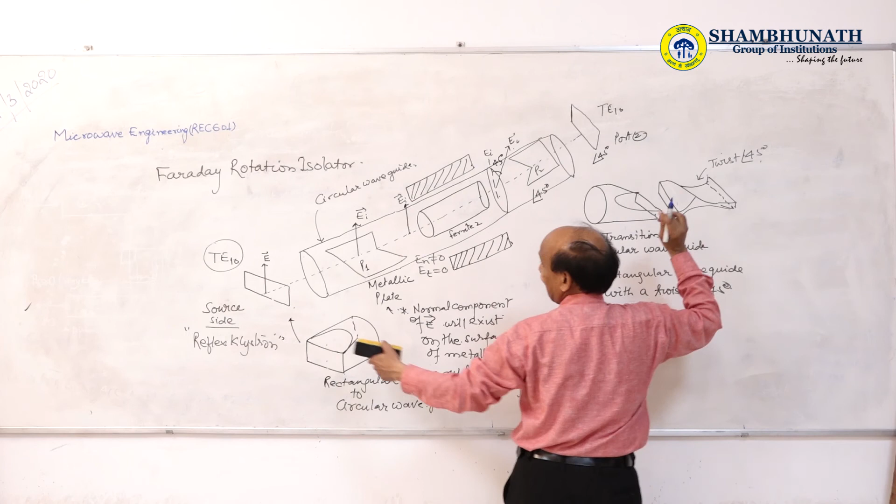The wave, when it has to move from the source side to the load side, will be maintaining TE10 mode, and when the wave propagates here, it is converted into the TE11 mode, which is the dominant mode of the circular waveguide. And again, this is going to be converted back into this TE10 mode.

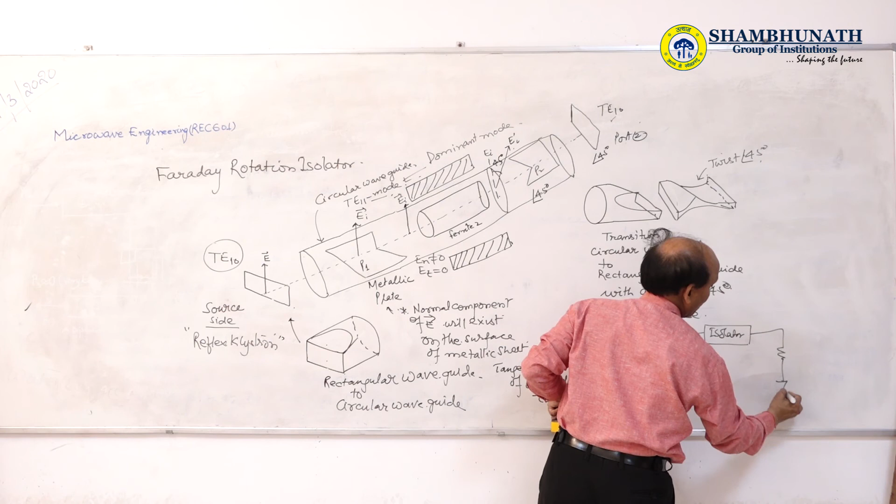But what happens when the mismatch occurs? Suppose this is source, and this we have connected our isolator, and suppose this is load, and source impedance is Z0. If load impedance and source impedance are not equal, means here the load is antenna, as we have seen in our lab. Antenna is the load, suppose antenna's impedance and reflex klystron's impedance, when there is a mismatch between the impedances.

When they are not exactly matching, then some of the power will reflect from here and it will propagate through this isolator, and this isolator will prevent this wave from reaching the source. Ideally, if this is providing full isolation, then this reflected power will not be reaching towards the source, and then forward power will be routed. If the interaction is taking place between the reflected power and the forward power, then the standing waves are created.

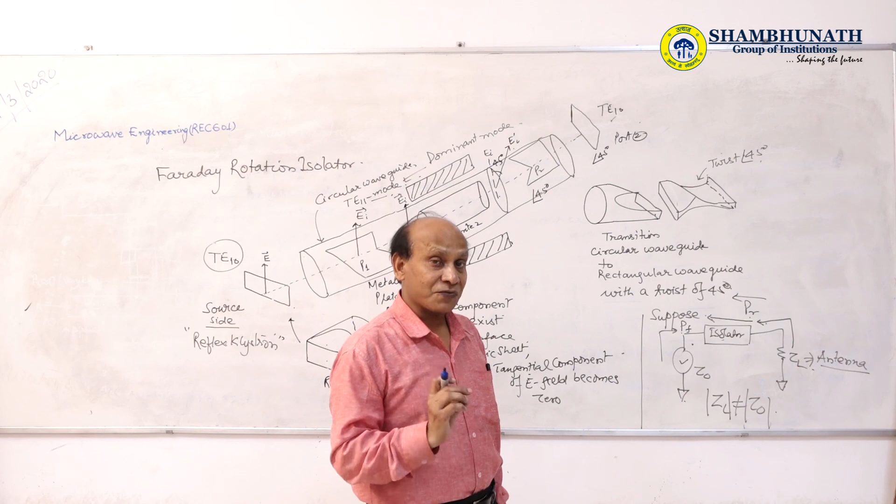That's why the SWR increases. So whenever in the practical field the impedance mismatches, reflections occur, and those reflections may degrade the communication property, or the power may not be fully transferred from our source towards the load.

So for that prevention, how is it preventing now? Let us see. It has made the forward direction, that the electric field or EM wave, containing electric and magnetic field vectors. Here we have shown only the electric field vector, not the magnetic field vector, as we have considered the vertically polarized waves.

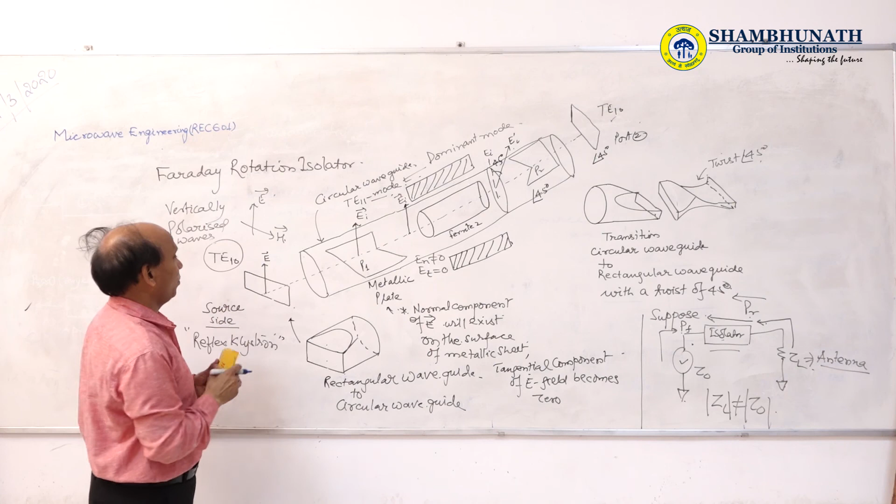And here they are creating the TE10 mode, and this wave is moving in this direction, and from here also it is moving at the same 45 degrees for the load side. So when it is reflected back due to the mismatch, then it will have the same dimension.

The power will be like this only, that is 45 degrees. This is incident power I, and this is I dash, the reflected power. Suppose onto this direction, that is 45 degrees, it has transferred. Now suppose it is moving, so this is again 45 degrees, it is tilted, so it will be maintaining its orthogonality, meaning it will be perpendicular onto the surface.

And when it is traversing through this, the ferrite rod has been meant for providing a rotation in the clockwise direction, whether it transfers from left side to the right side or right side towards the left side. It will provide the rotation towards the clockwise direction.

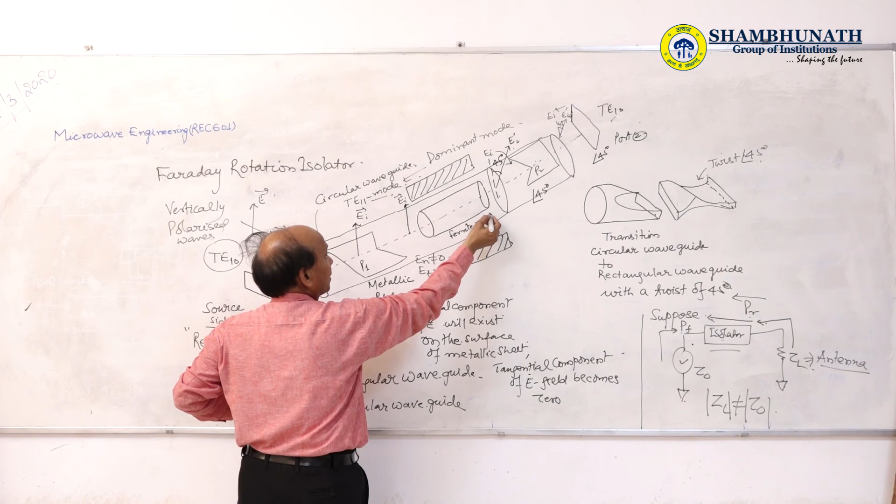So when it is transferring and coming onto this port, the wave will be moving from here at 45 degrees. Again it is tilting here. Suppose this is 45 degrees, and then it will tilt. This vector will be tilted, or rotated, by 45 degrees more.

And this is, we can say, EI dash reflected. If I say EI dash reflected power with reference to this, then this will have EI dash reflected power in this way.

So what is happening now? From the previous condition, it has traveled a total angle of 90 degrees. When it has traveled 90 degrees, it means this field which was in the forward direction, and this in the reverse direction, this field component becomes parallel and tangential.

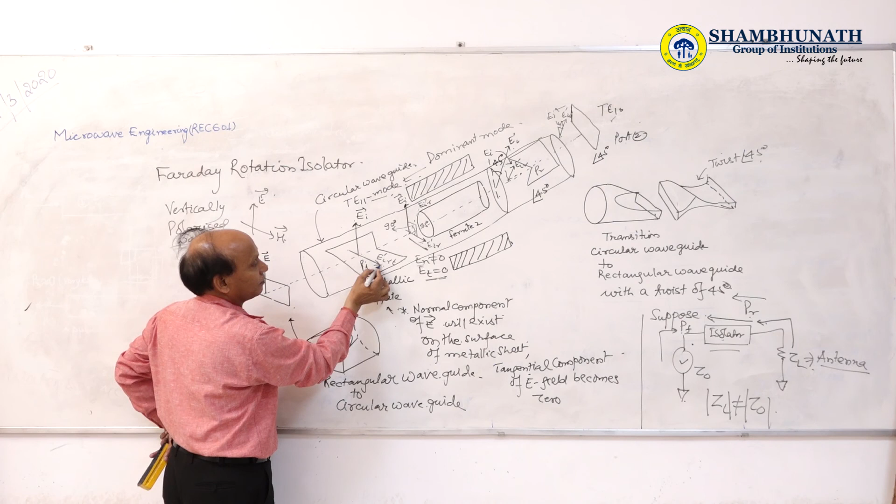This EI dash R reflected component becomes parallel or tangential onto this plate, the metallic plate. And here, what we have said is that when the tangential electric field comes onto the plate, it becomes 0.

This is the boundary condition, that tangential electric field becomes 0 when it becomes tangential onto the surface of the metallic sheet. So it means this power has been terminated. This field has been diminished to a very low level, and now it is totally terminated. This is finished, no power will be available onto this field. So the EI dash IRT tangential field becomes 0, so no power is available here, so reflected power becomes 0.

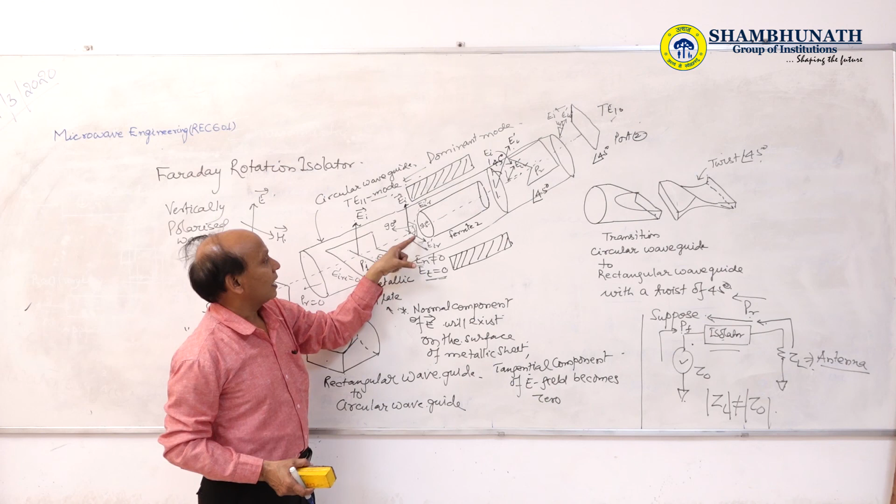It means that the forward power is propagating, but when reflection takes place, the reflected power, while traversing through this ferrite rod, has the same direction rotation in the electric field vector, and that electric field vector becomes tangential to this plate. This tangential component, being on the metallic sheet, becomes 0, so the reflected power becomes 0.

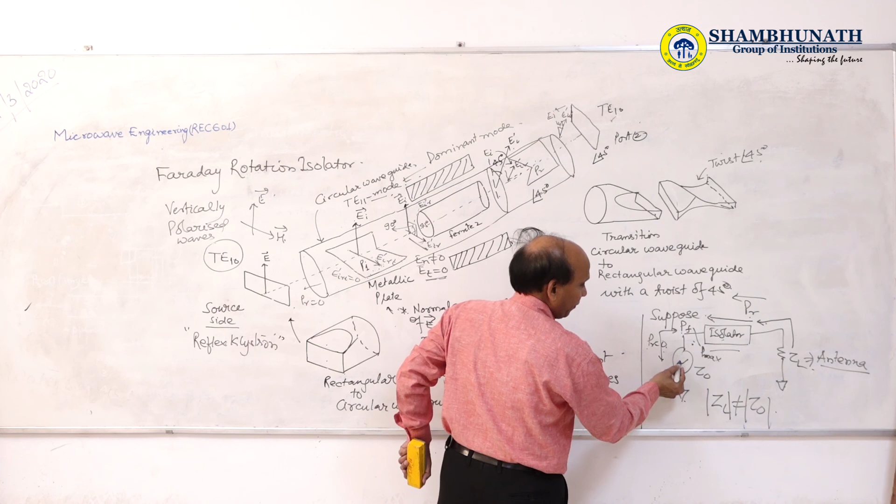So in this way, this isolator is saving our source. When the reflected power is 0 and the forward power is maximum, then ideally this device is saved, meaning the source used to generate the power is not going to take back the power. So this source is saved or prevented from damage. The power source connected at this port, such as the reflex klystron, will be saved from the reflected power.